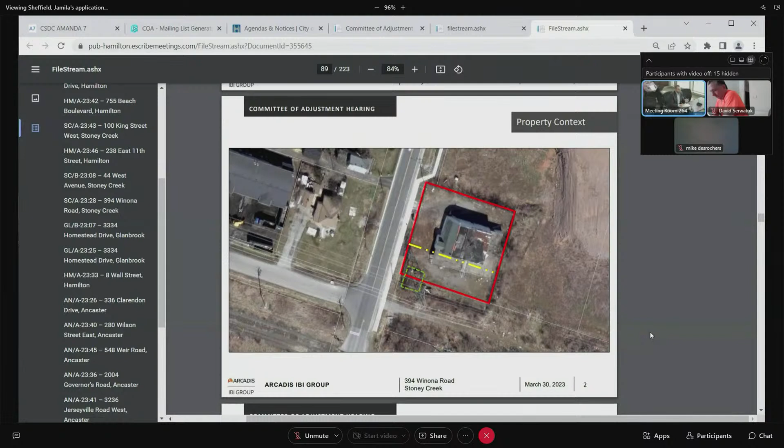When you look a little further south of that, you see the hydro tower in the bottom left-hand corner of the screen, which is part of the Hydro One easement. Further south, you have Railway Street, which is a trail but not an opened road, not an improved road allowance, at the intersection of Victoria Avenue. Further south is the CN Railway. This is the last property on the street. There's no real streetscape; once you move south of that, it's really just those utility uses. And that's the restriction to our site.

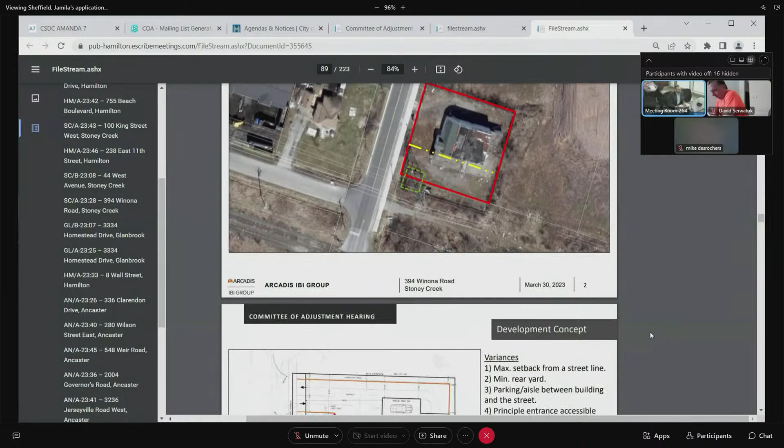The last slide shows the development concept, and we've provided some colors which may not be strictly visible on that screen. Again, we've identified that hydro easement in the blue dashed dot line across, and you'll see that it's close to the southerly edge of our building. Again, that's a restriction to what we can do in that space. You've got the green identifying the hydro corridor and the tower. So that identifies the constraints we're facing on this site.

If you look at the orange outline, that's the current proposal where our curb line is, and you'll note that our driveway is on the north end of the site. We wanted to keep it there. We can only have one site entrance, and we were restricted by proximity to the adjacent intersection of Victoria Avenue, so the north end of the site was really the most appropriate location for that driveway.

So what you have left over really was this space. We've identified it as 18 meters in width, and that's really, in our opinion, where the argument of appropriateness comes from. We are restricted to about a maximum of 18 meters of actual building face on this street, and the opinion of staff is that we need to provide that.

We don't agree with that interpretation, as I mentioned, and we think these variances are minor in nature. It is a permitted use in the zoning and the official plan, and not every permitted use can comply with every regulation in a zoning bylaw, and that's why we have minor variances. A retail use with a pedestrian orientation would probably be appropriate at the streetscape, but given the type of use, we don't think that the appropriate location was at the street.

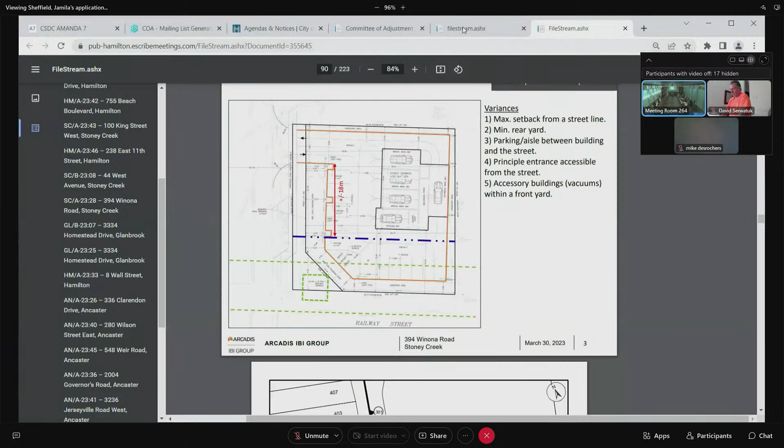Yes, thank you. Explain to me why you can't do that. Thank you, Mr. Chair. As you've seen in the report, we have a current site plan application, and we were told we could not get conditional approval because of these outstanding variances. Now we have a variance application before you, and we're told we can't have variance approval until we get site plan approval. So we're kind of stuck in a bit of circular logic, where we can't have one until we have the other, but we can't have the other until we have the one.

It's just that there's a little bit more input that goes into the site plan approval, and I myself would be a little bit uncomfortable giving you the variances without site plan control.

Correct, and through you Mr. Chair, the application has been through a formal review where they've identified these concerns, and we've met with staff, and they're not comfortable moving the site plan forward without the variances. Pre-Bill 109, some of these detailed concerns, noise and other metrics, are addressed as conditions of approval, and that's where we find ourselves. The real argument is just the proximity of this building in relation to a street. We disagree with the staff opinion, and to be honest, we've looked at many different iterations, and I don't know where the common ground would be.

Okay, committee? What do you want to do?

Nancy? So we've been in this position a few times, I know we have, and I guess I look at it as a risk from the applicant. If we did this with a condition upon site plan approval, they could lose-lose, and it's a total no-win situation. So I would be inclined, because it's a very isolated piece of property that isn't going to be used for anything else — highest and best use comes to my mind over and above all things in this particular instance — so I don't really see a problem with it, because the risk is on those guys if they can't get site plan approval.

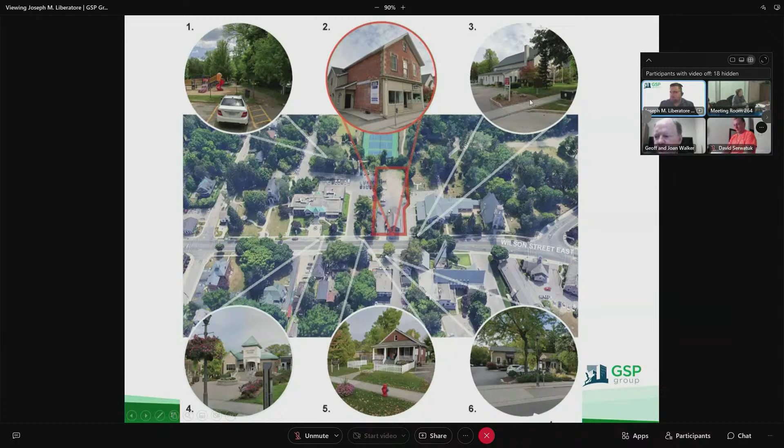Okay. So with respect to the site, it's located along Wilson Street East in the village core of Ancaster. It's immediately surrounded by some institutional uses, including the St. John's Anglican Church, immediately to the south of the site, which is located here, number 3. The purpose of this application was to facilitate the construction of these townhouses to the rear of the existing mixed-use building, so where the site alteration is proposed is in this red boxed area to the rear.

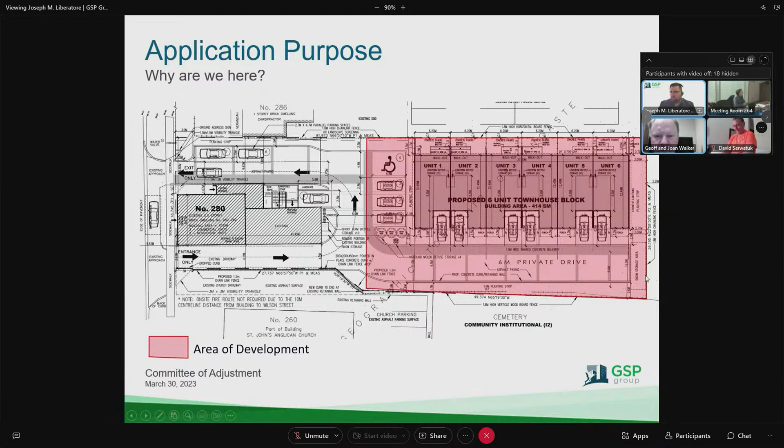Variance number 3 relates to that visual barrier, which is required as part of the zoning. So where we're proposing the visual barrier is where that development is proposed, and not where the existing condition is to be maintained through the preservation of the existing mixed-use building, as well as the drive aisle located where this red line is.

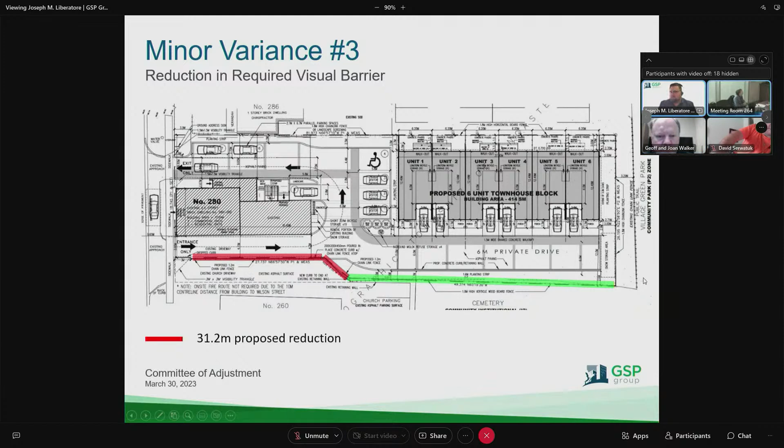When we look at the comment from staff with respect to the compromised privacy, and they're not supportive of that reduction of the visual barrier, we look more closely at the existing condition of what that 4-foot chain link fence looks like now, and the proposed reconstruction with a new chain link fence, which would improve the existing condition. However, it does require that variance, where the wording of the bylaw prescribes that a visual barrier be constructed particularly in that area as well.

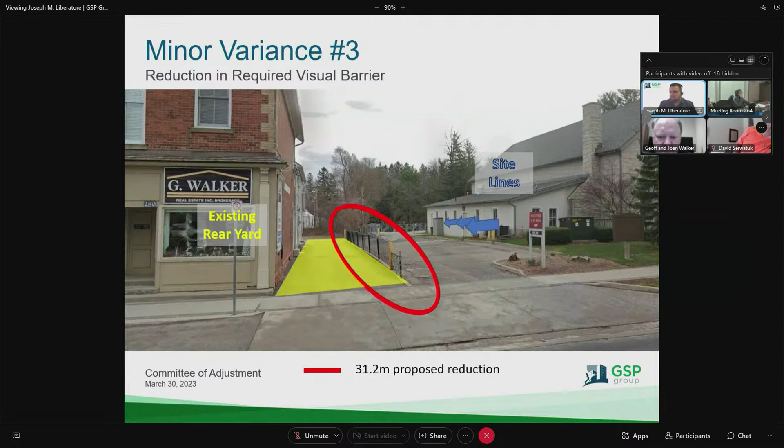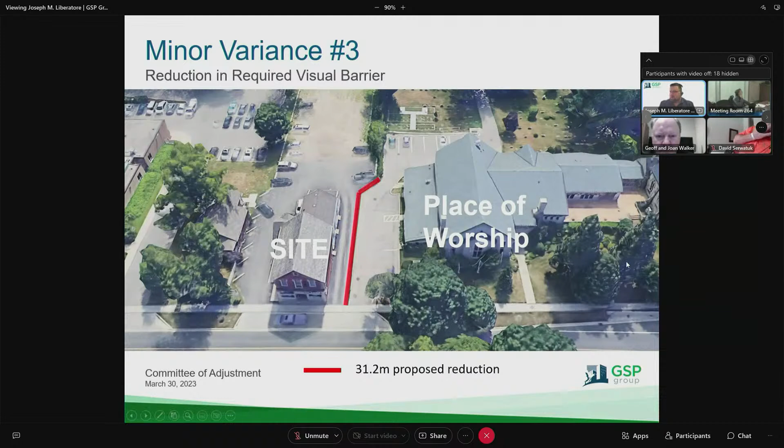The sight lines go from a parking area to a drive aisle parking area, and you can see the two accesses immediately adjacent to one another. This isn't something that's going to be altered through the construction of the new townhouses to the back; it's a completely separate item. Here you can see it from the top view as well, showing how that relates to the site and the distances from the building to where this is to be constructed.

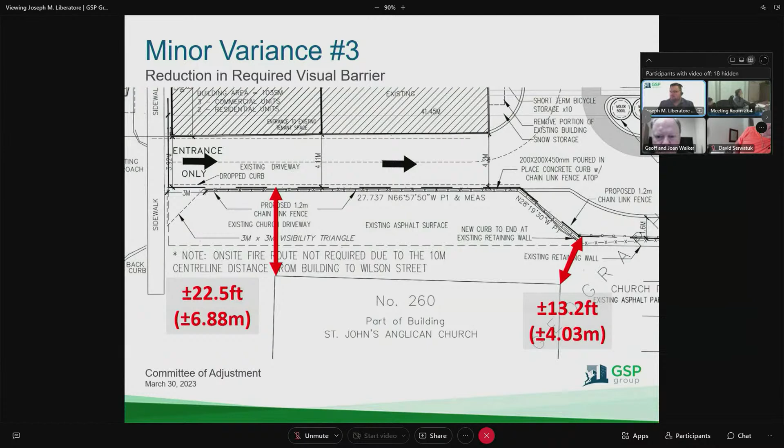With that being said, and the opinion provided in the planning justification that it does meet the four tests, we respectfully request that committee approve variance number 3 with regards to the reduction to the visual barrier. I'm available for any questions and happy to assist. Thank you very much.